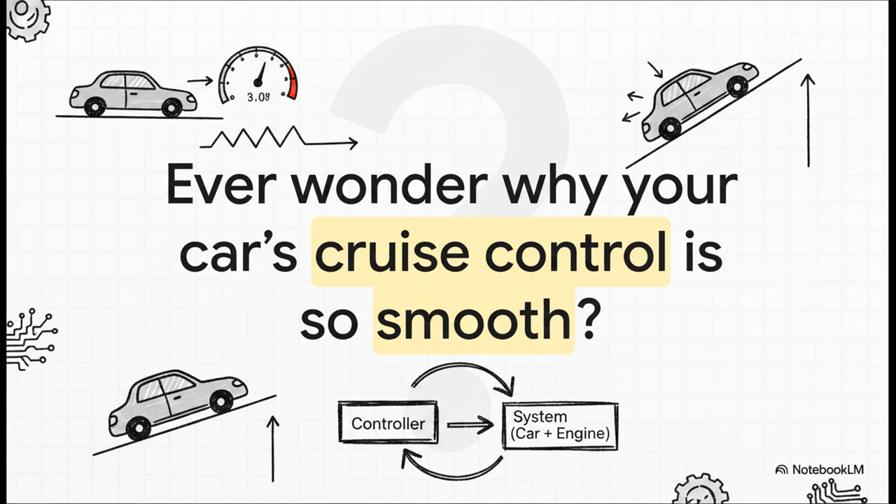So let's dive right into that exact scenario. We'll call it the constant cruise control problem. Honestly, it's the perfect way to break down the core challenges that all of these control systems are designed to solve. Okay, so here's the fundamental issue. That uphill slope, an engineer would call that a disturbance. It's an outside force that's trying to mess with our system. Without some kind of controller, your car would naturally slow down going up and speed up going down. So the mission is pretty clear. Build a system that can fight these disturbances all on its own.

The first and probably the most intuitive way to solve this is with something called feedback control. It's a really simple and totally reactive way to solve a problem. The logic here is just so straightforward. The system is constantly asking itself three simple questions. One, how fast are we going right now? Two, is that the speed we want to be going? And three, if not, what do I do to fix it? It just measures, compares, and then corrects. This little loop runs over and over and over, constantly tweaking the throttle to get rid of any error.

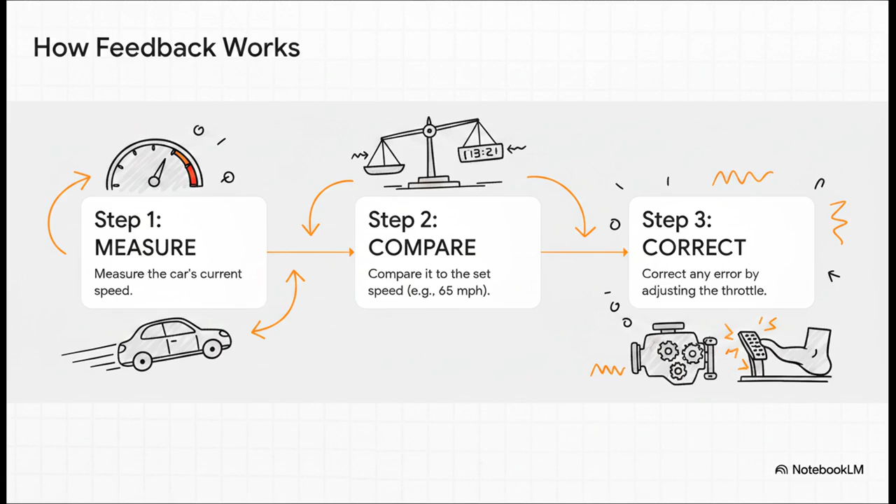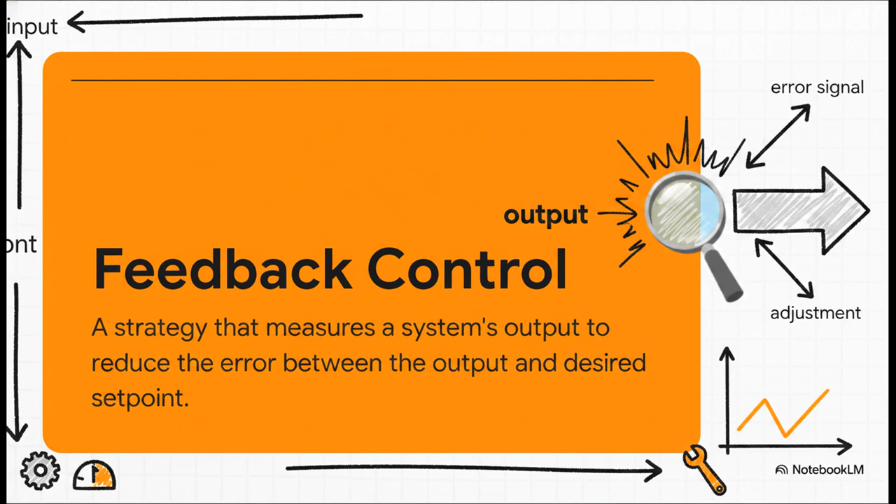And that's the formal definition right there. It's all about looking at the result, the output, and then feeding that information back to the input to shrink the error. The most important thing to get here is that it only acts based on the effect of a disturbance. And this highlights feedback's real superpower, robustness. You see, the system doesn't need to know why the car is slowing down. It could be a hill, a crazy headwind, maybe even a tire going flat. It doesn't care. It only sees one thing, the error, that drop in speed, and it acts to fix it. This is what makes it so incredibly reliable.

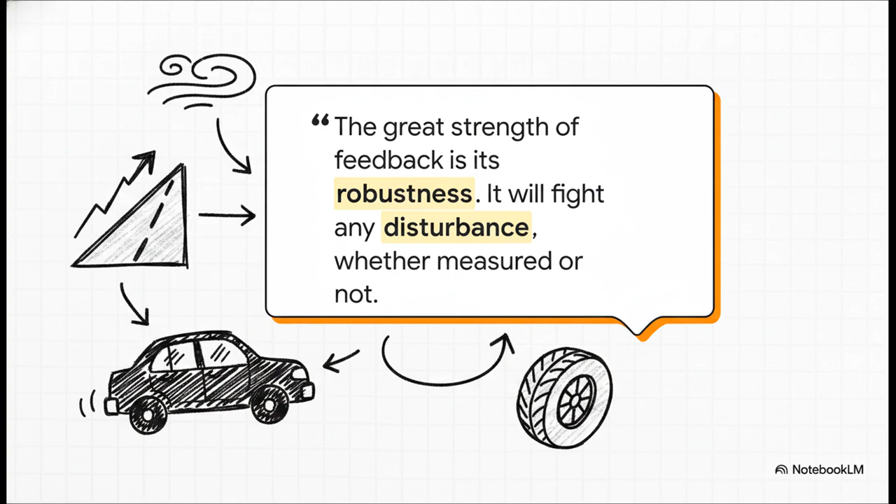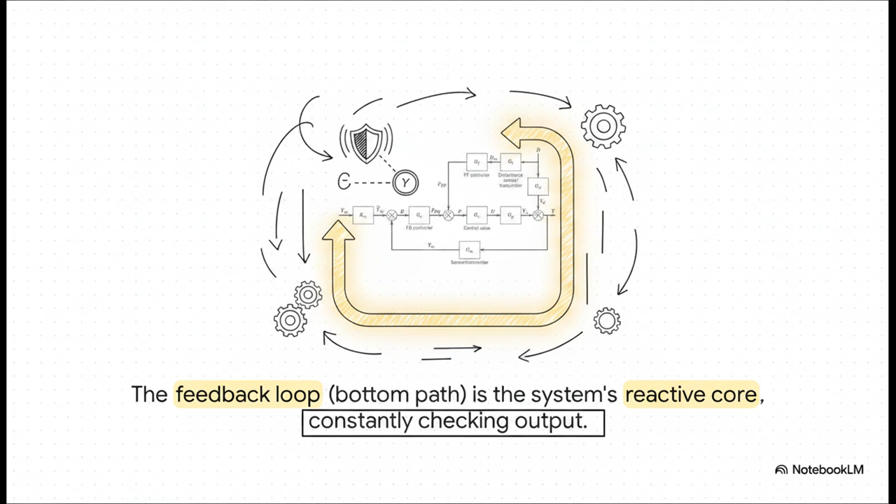And here's what that looks like in a proper engineering diagram. Now, don't let the boxes scare you. Just follow that main loop along the bottom path. You can see the output is measured, and then it's fed all the way back to be compared with the speed we want. That constant loop is the absolute heart of feedback control. Always watching, always reacting. But there's a catch.

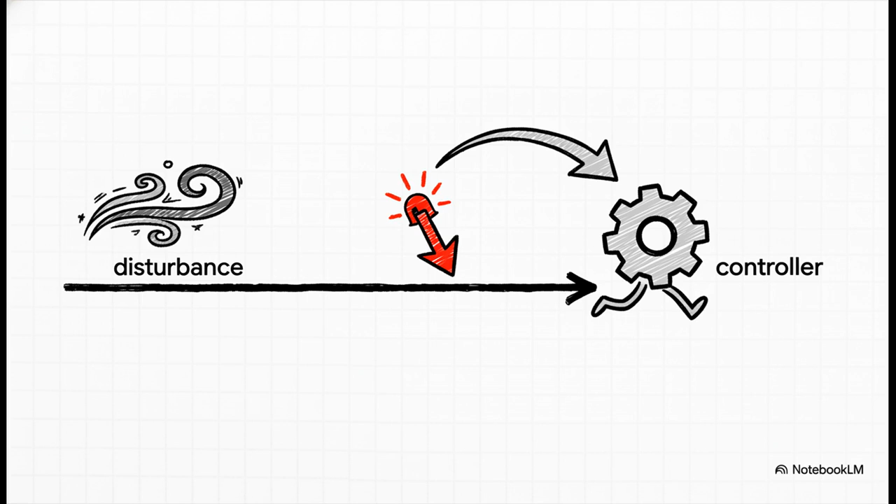Of course there's a catch. For feedback to do anything, an error has to happen first. The car actually has to start slowing down before the system can do anything about it. So it's always playing catch-up. Now, for a lot of things, that's totally fine. But what if we could be faster? What if we could be predictive? And this brings us to a much more advanced strategy, feed-forward control. This is the proactive, predictive fix that we were just talking about.

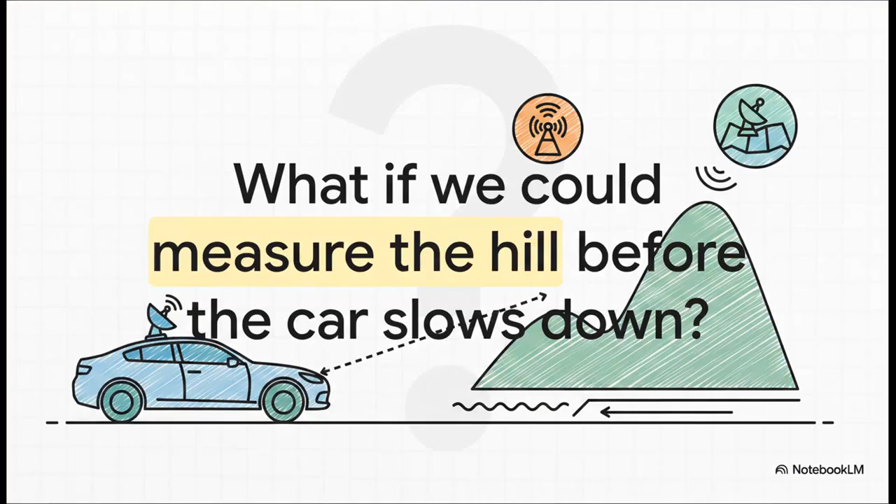This is the million-dollar question. What if our car had a sensor, I don't know, maybe a GPS with terrain data, or some forward-looking scanner that could actually detect the hill coming up? What if the system knew about the disturbance before it even had a chance to affect our speed?

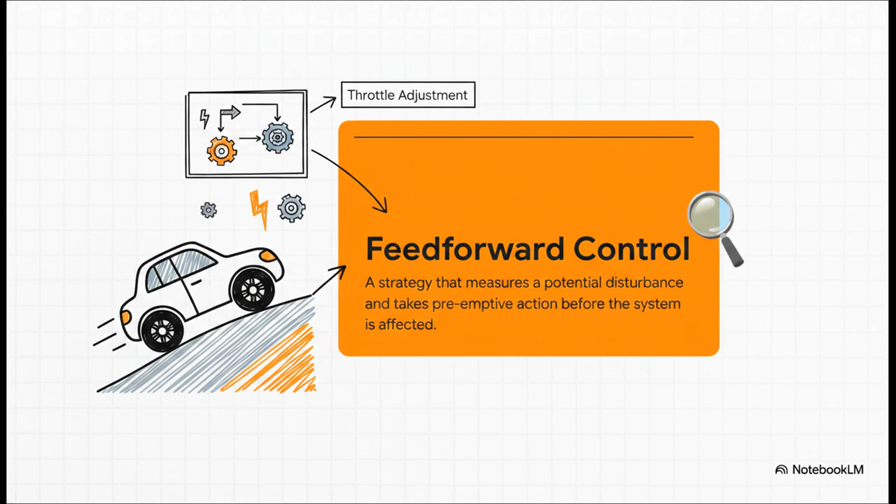And that's the whole idea behind feed-forward. Instead of measuring the output, which is the speed, it measures the disturbance itself, the hill. It then calculates the exact amount of extra gas needed to cancel out that hill, and applies it before the car even has a chance to slow down. It's preemptive. So let's put them side by side. Feedback is reactive. It feels the car slowing down and then hits the gas. Feed-forward is predictive.

It sees the hill coming and hits the gas before anything happens. One gives you that rock-solid robustness, the other gives you pure speed. But feed forward has its own fatal flaw. It is not robust at all. It can only handle the specific problems it's been designed to look for.

So yeah, it can handle the hill, but it has no idea what to do about that sudden headwind we talked about. It's incredibly fast, but it's also fragile. And that's why you basically never see it used all by itself. So if one is robust and the other is fast, what's the logical next step? Well, you combine them, of course. This is where we get to create a system that truly has the best of both worlds.

And here it is, the full picture. Let's look at our diagram again, but now you can see both paths are working together. The feed-forward controller, that's the top path. It sees the disturbance and makes that fast, preemptive move. It does all the heavy lifting. And meanwhile, our trusty feedback loop down at the bottom is still there, just cleaning up any tiny little errors that might get through, like from that unmeasured headwind.

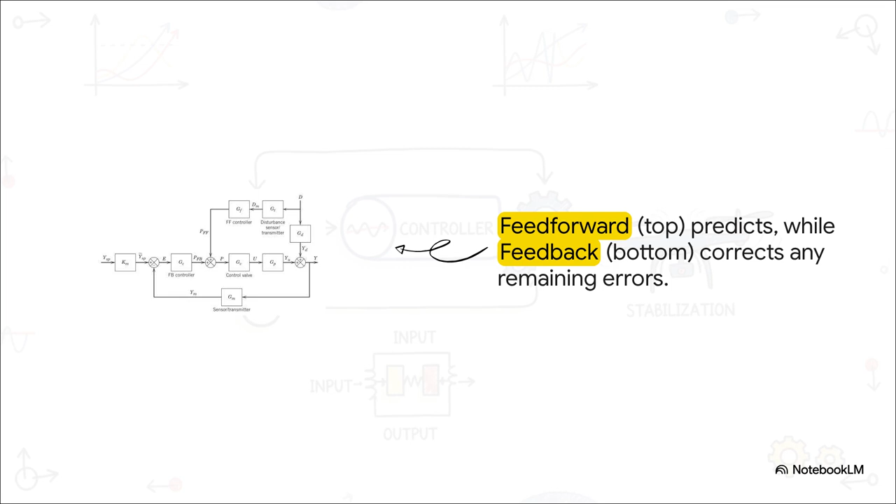And this is the main takeaway. They cover for each other's weaknesses perfectly. Feed forward makes the big, fast, predictive move against problems we know are coming. Feedback follows right behind it, making sure everything is exactly on target and safe from the unknown. It's a beautiful partnership. Okay, so combining feedback and feed forward gets us a near perfect system.

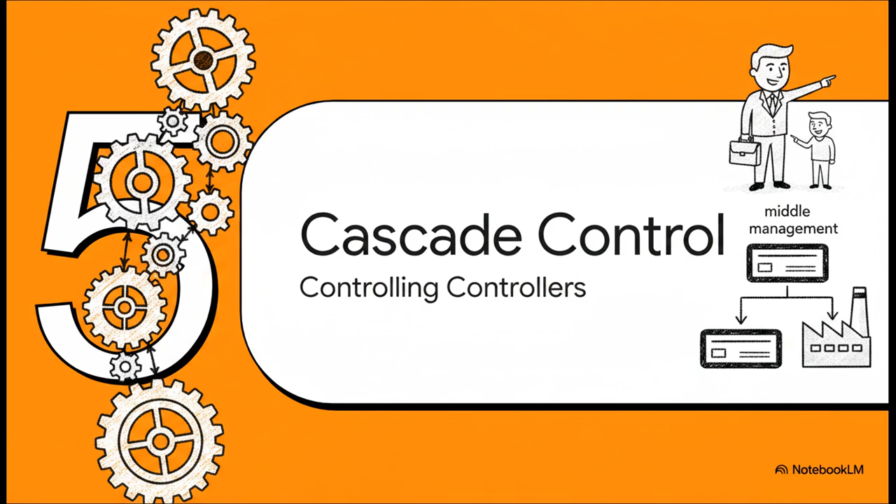But what about really complex situations where the inputs themselves are unstable? For that, we need a pro-level technique called cascade control. The easiest way to think about it is that we're basically introducing middle management into our system. Just imagine a main manager, that's the outer loop. Its only job is to watch the big picture goal, like the final temperature of a product.

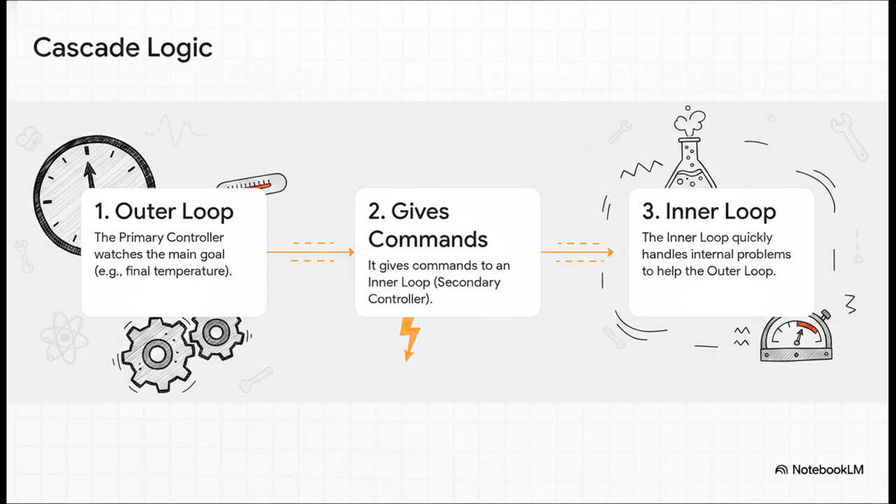Now, instead of controlling the heater directly, this manager gives a command to a worker, the inner loop, and says, hey, I need the steam pressure to be exactly X. The worker's only job is to maintain that steam pressure, quickly fighting off any little fluctuations before they ever have a chance to affect the final temperature. The manager manages the worker, and the worker manages the process.

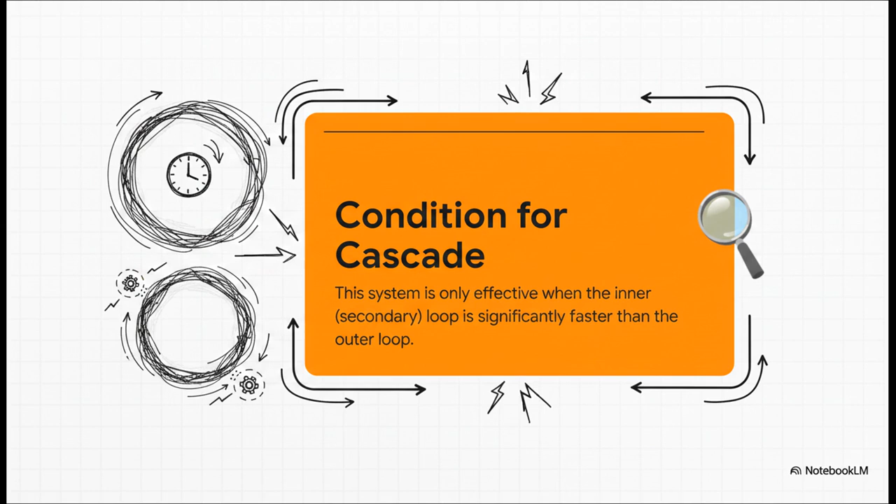But there is one golden rule for any of this to work. The inner loop, our worker, has to be way faster than the outer loop. That worker needs to be able to solve a dozen small problems in the time it takes the manager to even realize something might be slightly off. Okay, so we've got feedback, feed forward, and cascade in our toolbox. Let's see how these all come together to run some really critical pieces of industrial equipment.

Okay, let's look at a power plant boiler. The number one goal is to keep the water level perfectly stable. That's the main job for our feedback controller. The biggest disturbance is how much steam is being pulled out, so a feed-forward controller watches that and predicts when we're going to need more water. And finally, the flow of that incoming water can be a bit unstable, so a super-fast cascade controller's only job is to keep that input flow rock steady. You've got all three strategies working together in perfect harmony.

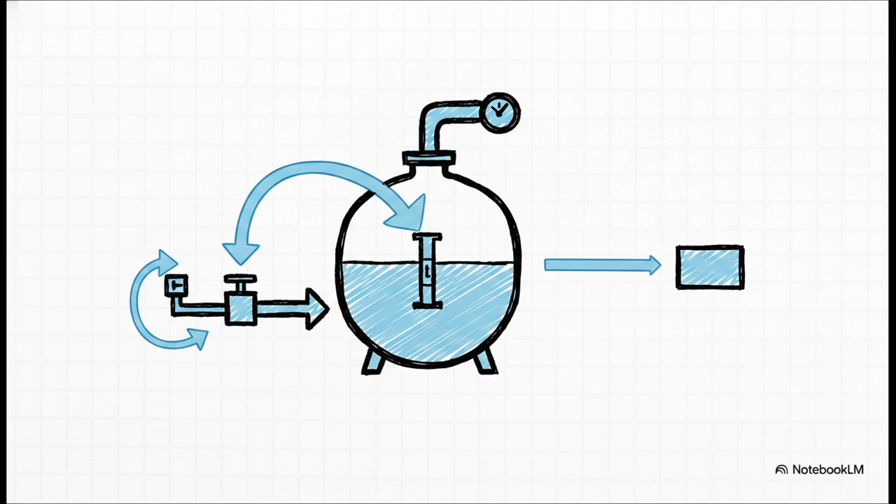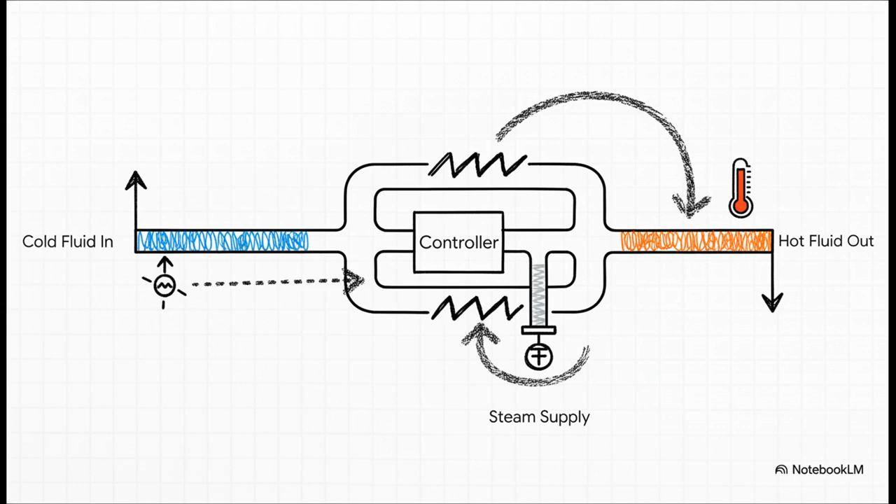And we see the exact same pattern in something like a heat exchanger. The final temperature of the fluid is the big goal. That's handled by feedback. Any changes in the fluid coming in are the main disturbance, so that's handled by feed forward. And the steam used for the heating? Well, its pressure can fluctuate. And those fluctuations are quickly stamped out by a dedicated cascade loop. It is just an elegant and incredibly effective design.

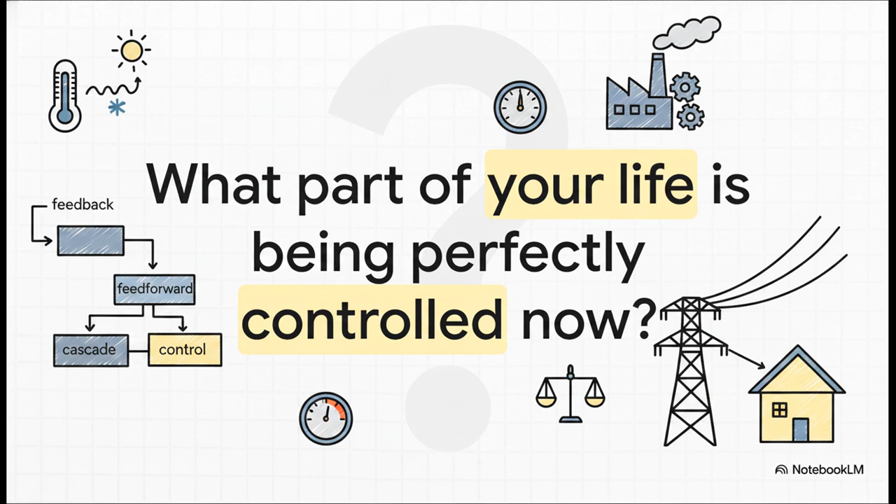From the thermostat on your wall to the massive systems running our power grids and our factories, these principles, feedback, feed forward, and cascade, are literally everywhere. They are the silent, tireless guardians that keep our world in balance. So the next time things are running just a little too smoothly, you might just have an elegant control system to thank. What do you think it is?